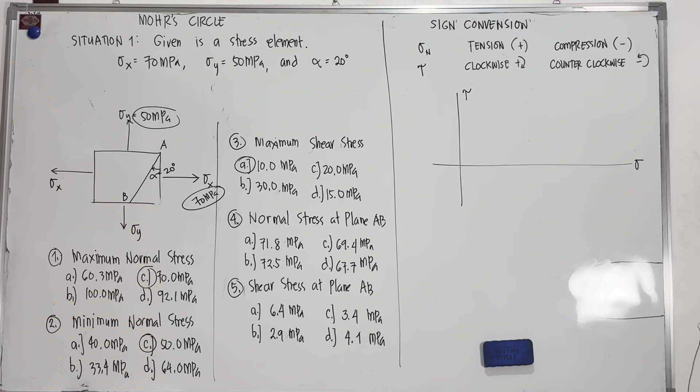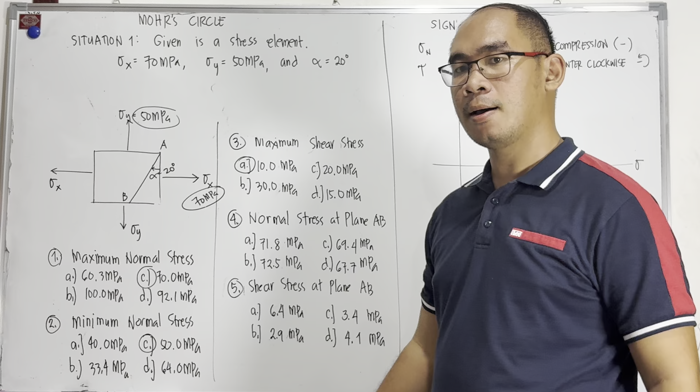Okay, so good day. For today's topic, we will discuss about the Mohr's circle. But before we solve the problem, let us discuss first the concept of our Mohr's circle.

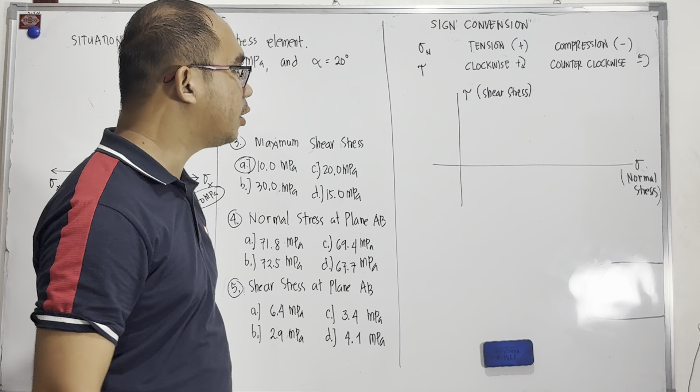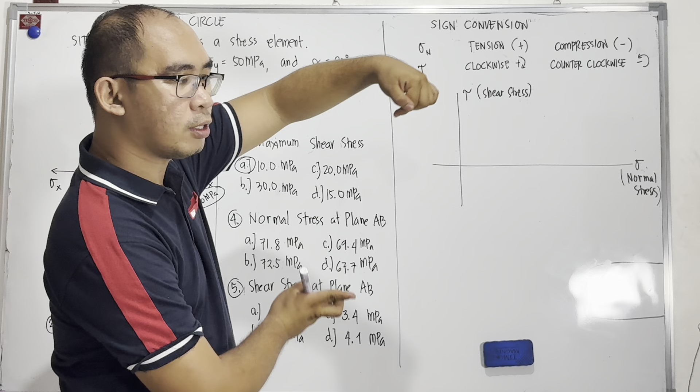So for today's problem, this is the given. Given is a stress element. The normal stress in X is 70 megapascal. Normal stress Y is 50 megapascal. And the angle of the failure plane is 20 degrees.

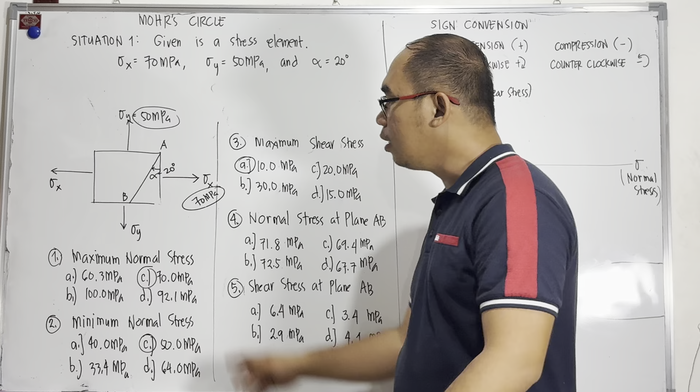So to solve that problem, let us first plot these points. When we plot this point, since it is normal stress, this is the X coordinate. Then the Y coordinate is the shear stress. We have no given shear stress here, so that means if there is no given shear stress, the value of our shear stress is 0. So to plot this point, that is positive, our x is 70, then our y is 0.

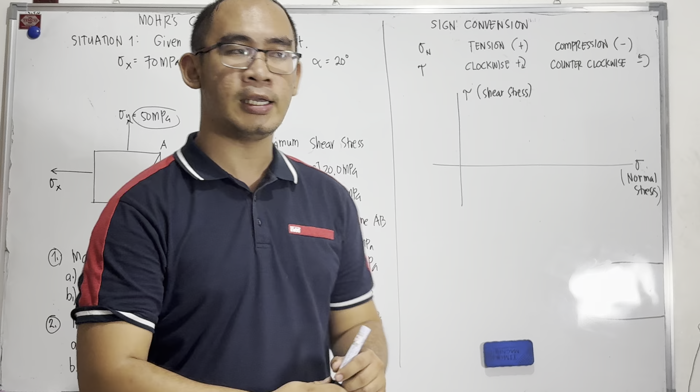So that point means 70, 0. So let's say this is 70, then this is 0. Okay, 70 is the normal stress, then 0 is our shear stress. Okay, that's it. Then it's the same on the other side.

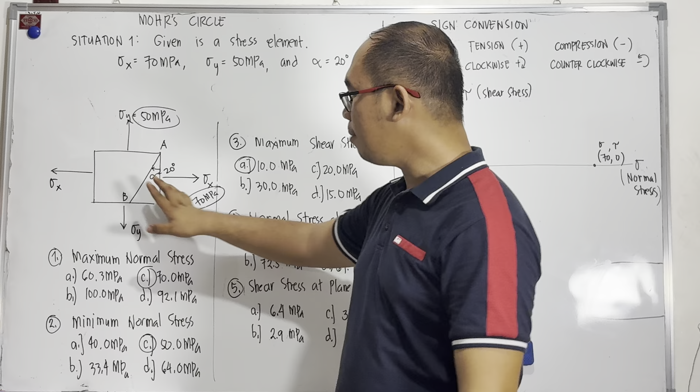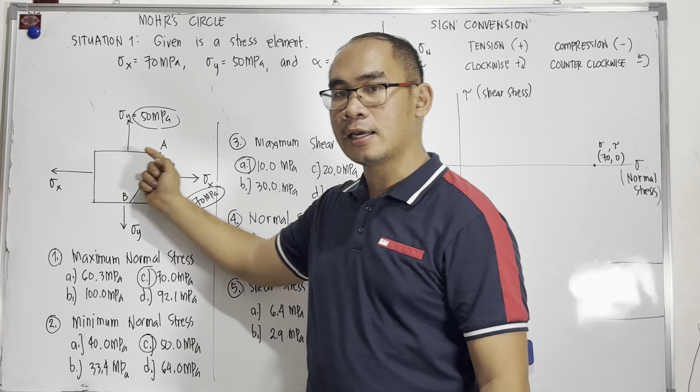50. Did we see any shear stress? None. So x coordinate is 50, then y coordinate is 0. So how do we plot that? That is 50 and 0.

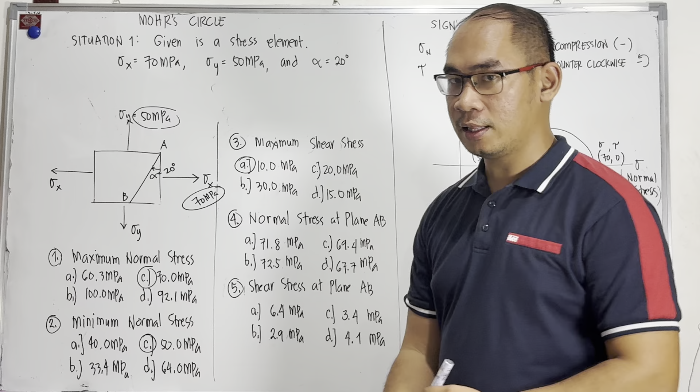Okay, so let me remove the circles first. So what is the maximum normal stress? The maximum normal stress will give us the maximum value of our normal stress. So if this is our circle, we have maximum normal stress, this is the distance.

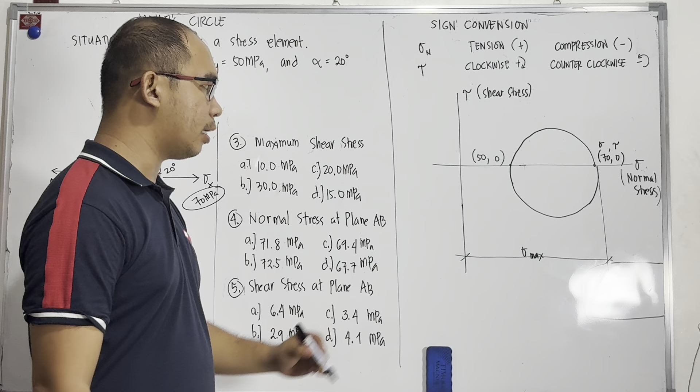This is our maximum normal stress. And how much is that maximum normal stress? That is 50, then that is 70. So maximum normal stress is 70 megapascal. So the answer for problem number 1 is 70 megapascal, letter C. Okay, so for problem number 2, minimum normal stress.

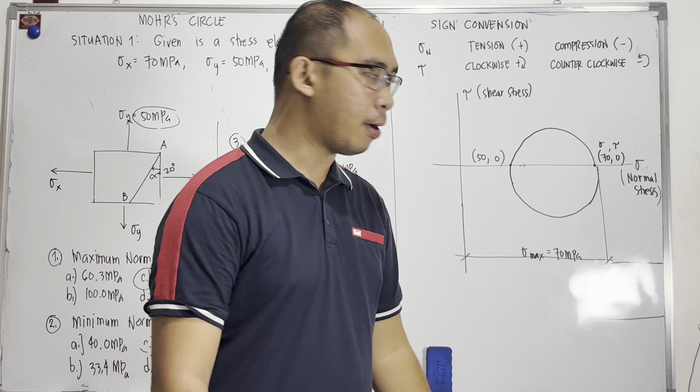So normal stress minimum, is that the distance? 50 megapascal. So the answer for problem 2 is 50.

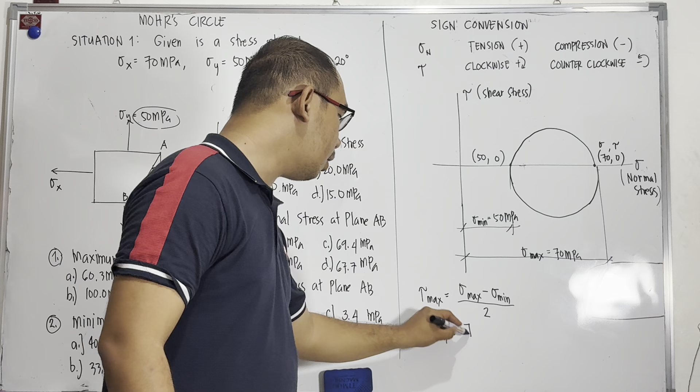Okay, so for problem number 3, maximum shear stress. To solve the maximum shear stress, we take our 70 megapascal and minus 50 from it. What we get there is the diameter. So for the maximum shear stress, we can derive a formula from this relation: normal stress maximum minus minimum. Once we get that, that's the diameter, so we divide by 2 to get the radius. So the maximum shear stress now is equal to 70 minus 50 over 2. So the maximum shear stress is 10 megapascal. So here is the answer for problem number 3.

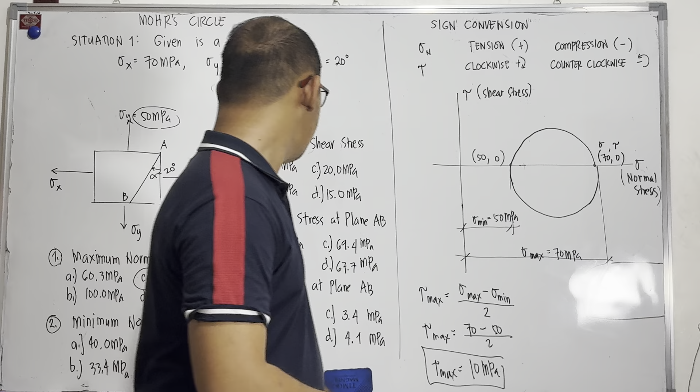So for problem number 4, what is the normal stress at plane AB? If we notice, this is our plane AB, the failure plane after the load has been applied. After the load was applied, our stress element split like this. This is that part, and it formed a 20 degree angle. To solve this, let's say this is our plane. After the load was applied, a failure occurred, and that is in the clockwise direction. Since it's clockwise, we rotate clockwise from here too, so it becomes like this.

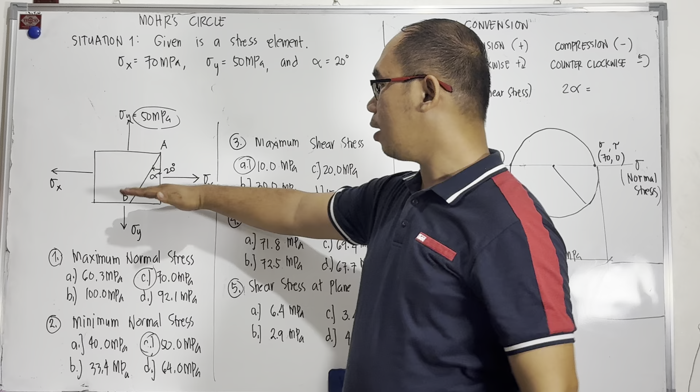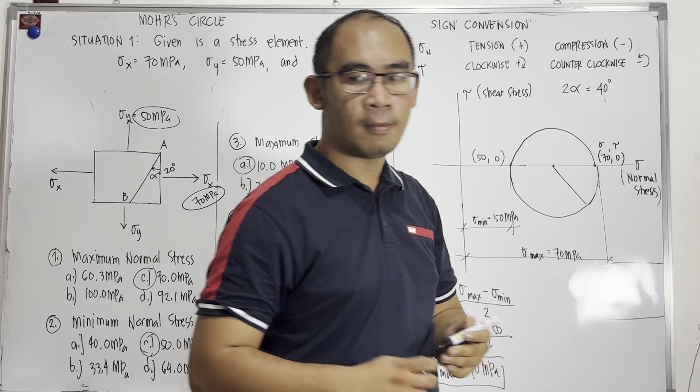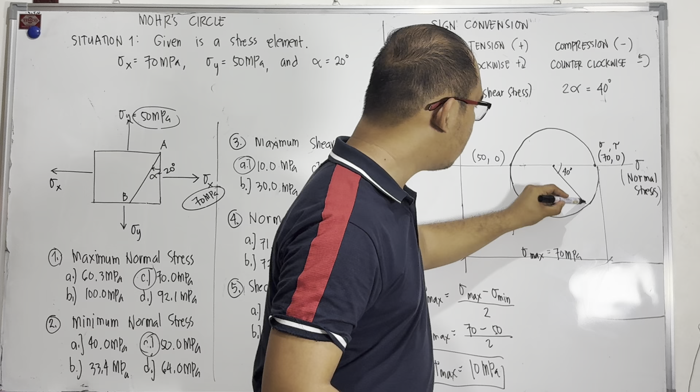So to compute for twice the angle, if alpha is 20 degrees, twice the angle is 40 degrees. Always remember that in Mohr's circle, we have to double the value of our normal stress angle. So to solve this, here is twice the angle, which is 40 degrees. Now to solve for our normal stress, here is our normal stress in X.

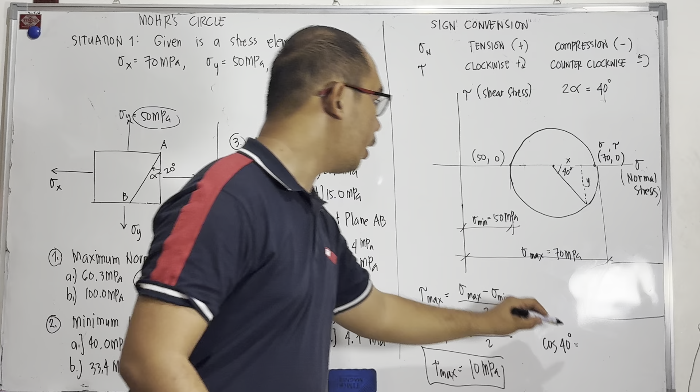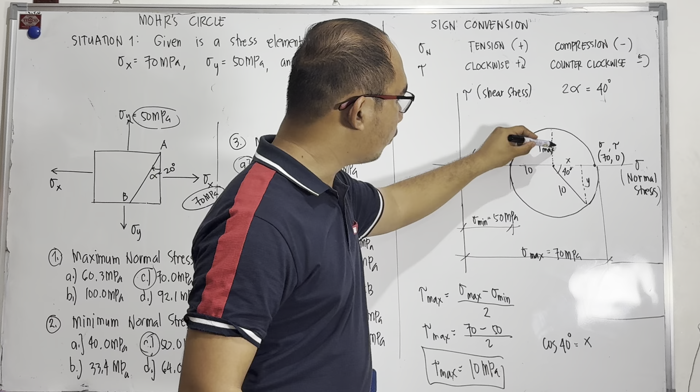So normal stress of AB. Let's say this is X and this is Y. How do we solve for X and Y? To solve the normal stress, we use cosine. Cosine theta, cosine 40 degrees is equal to X over the radius. Our radius is 10 megapascal - this is 10, and this is also 10 megapascal, which is the maximum shear stress we got earlier, 10 megapascal. So that is X over 10. Therefore, the value of our X is 10 cosine 40, which is 7.66.

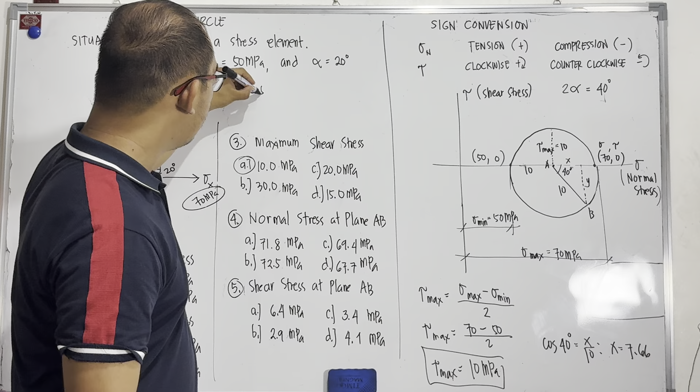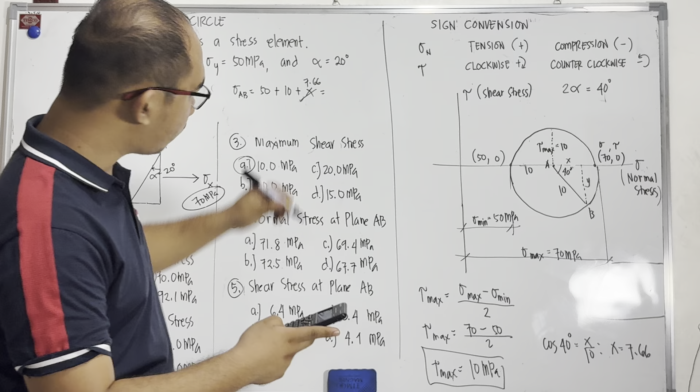So to solve for the normal stress at AB, let me write this: normal stress of AB. This will be A and B. So that is 50 plus the radius of 10, plus our X distance. That's our normal stress at AB. So how much is that? Our X value here is 7.66. So 50 plus 10 plus 7.66 gives us 67.66 megapascal. So the answer for problem number 4 is letter D.

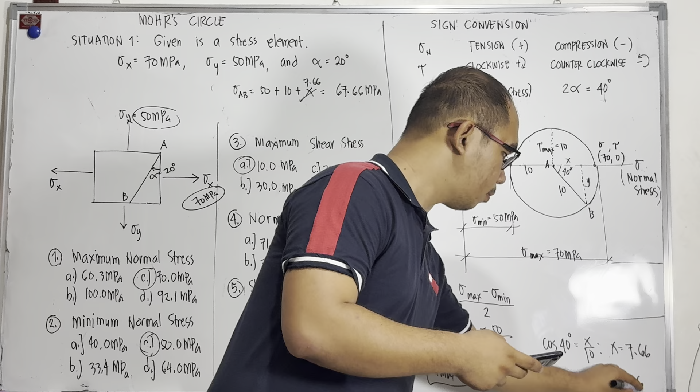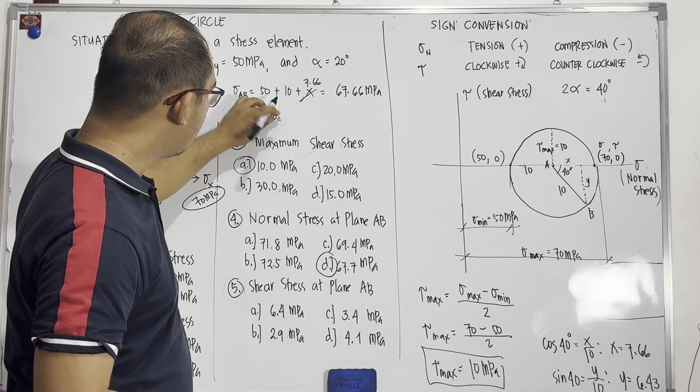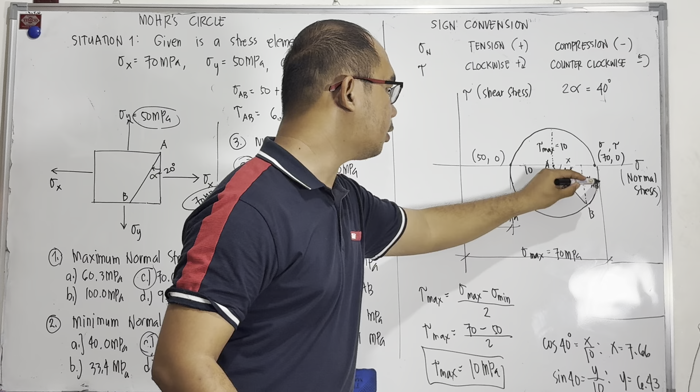Okay, so for the shear stress at plane AB, that's the distance-wise component, so we need to use sine here instead. Sin 40 is equal to Y over 10. Solving for the value of Y: 10 sin 40, that is 6.43 megapascal. So our shear stress at AB is 6.43 megapascal. That gives us the normal stress and shear stress of plane AB. This is the shear stress of AB, which equals Y, 6.43 megapascal. So the answer for problem number 5 is letter A.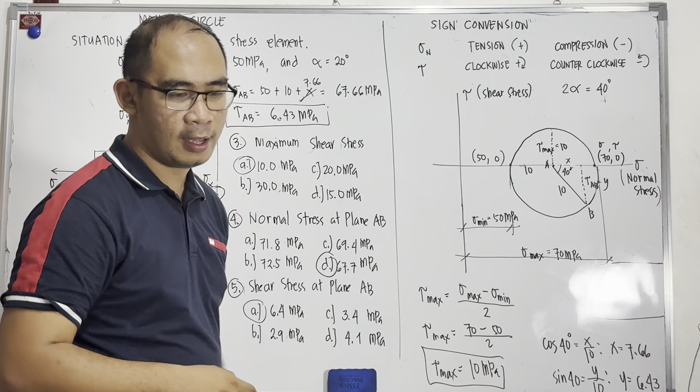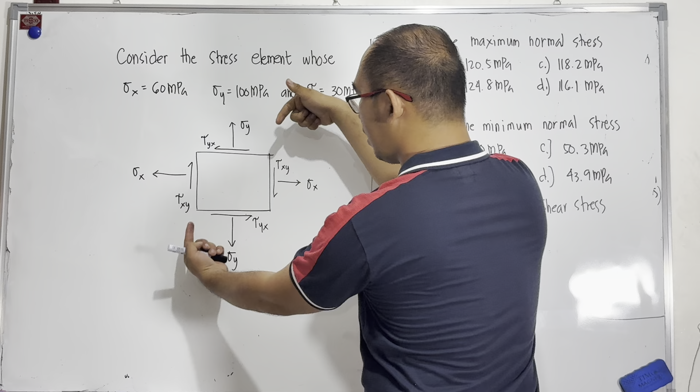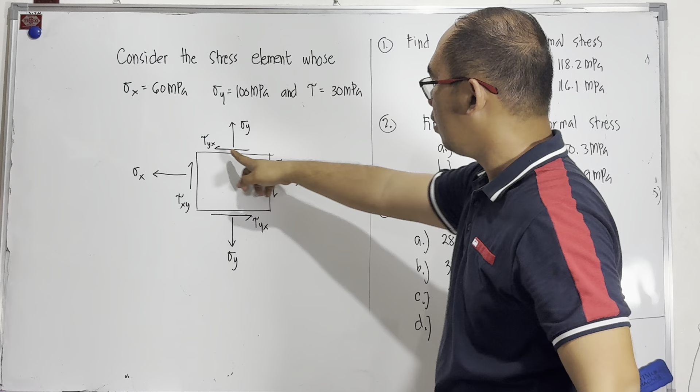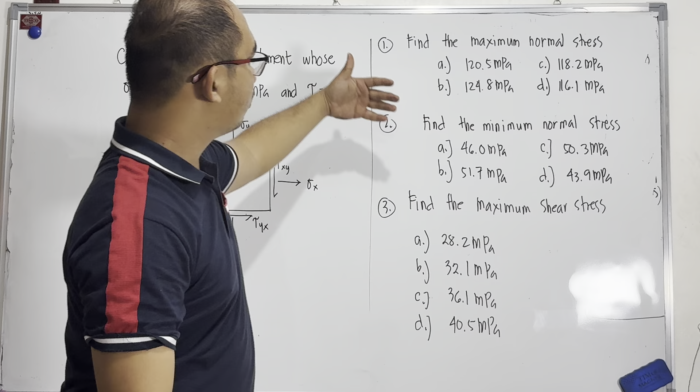Here's the problem you can try to solve. Consider the stress element whose normal stress in X is 60, normal stress in Y is 100 megapascal, and the shear stress is 30 megapascal. These shear stresses are all 30. Notice here, if you plot that, you already have an X coordinate and Y coordinate. The X coordinate is the value of normal stress X, then our shear stress of 30. So 60, 30 - plot that. Then check what direction it becomes: it will be clockwise direction, and the other one counterclockwise. So plot it, then try to answer the problem. Here is what's being asked. Then check if your answer matches the choices.